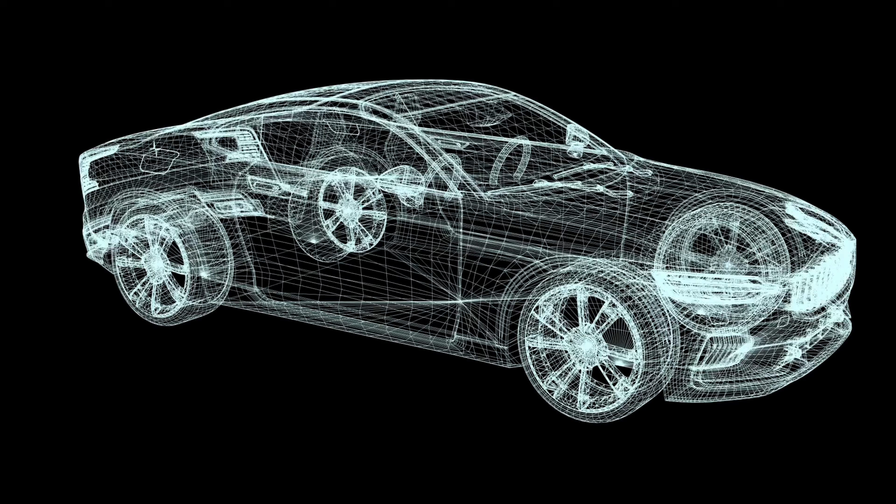AI is changing the way engineers work. From requirements and calculations, to CAD, simulation, testing, and design reviews, each stage has different opportunities and different limits. In this video, we'll connect those pieces into one engineering workflow. By the end, you'll see how these individual capabilities can be combined into a structured engineering workflow, and where AI can genuinely improve engineering productivity without compromising engineering judgment.

A large language model is fundamentally a probabilistic sequence model. It predicts tokens based on patterns learned from its training data and the context provided to it. It does not perform a free body diagram in the same way an engineer does. It does not automatically know whether a particular edition of a standard is applicable. And it does not have a physical connection to your machine.

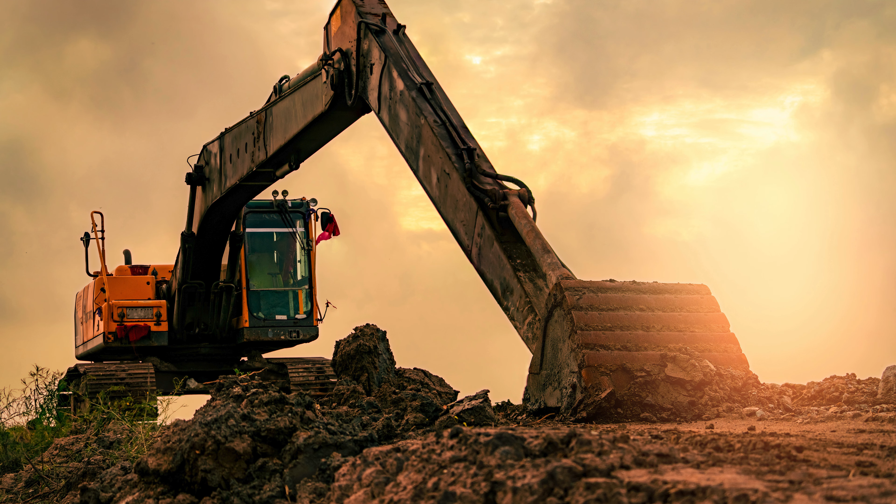So when an AI gives you an engineering answer, you should not ask, "Does this sound correct?" Ask, "What evidence supports this answer?" That changes everything. AI output should be treated as a hypothesis, not as engineering approval. The verification chain remains. AI, then engineering calculation, then validated simulation, then testing where required, and finally, engineering judgment.

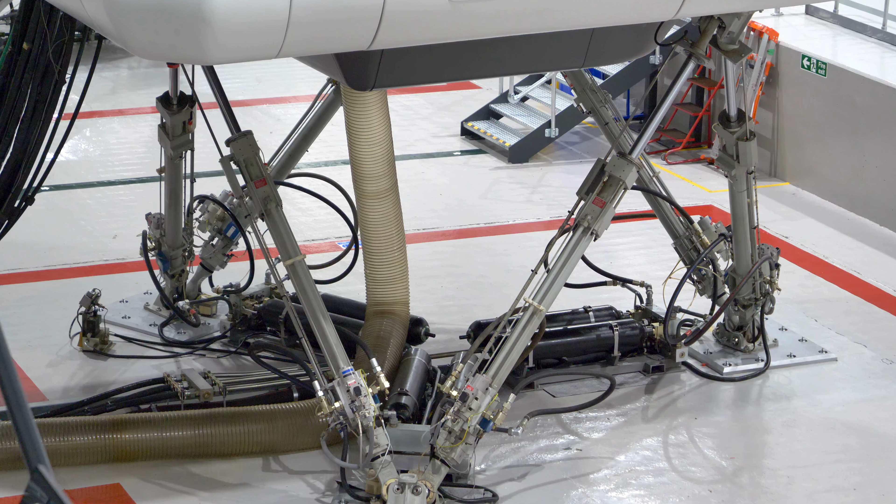This is probably the biggest change I would recommend. Don't start with, "Design a hydraulic cylinder mounting bracket." That is a poor engineering prompt. Instead, define the engineering problem. For example, I am designing a welded hydraulic cylinder mounting bracket. The maximum cylinder force is 180 kilonewtons. The cylinder pin diameter is 60 millimeters.

The bracket is fabricated from S355 structural steel. The machine experiences cyclic loading. The design life is 10 years. Identify the critical load paths, potential failure modes, required calculations, missing information, and applicable verification methods. That is a much better interaction. Mechanical engineering is not just calculation. It is problem formulation, and AI can be extremely useful at that stage.

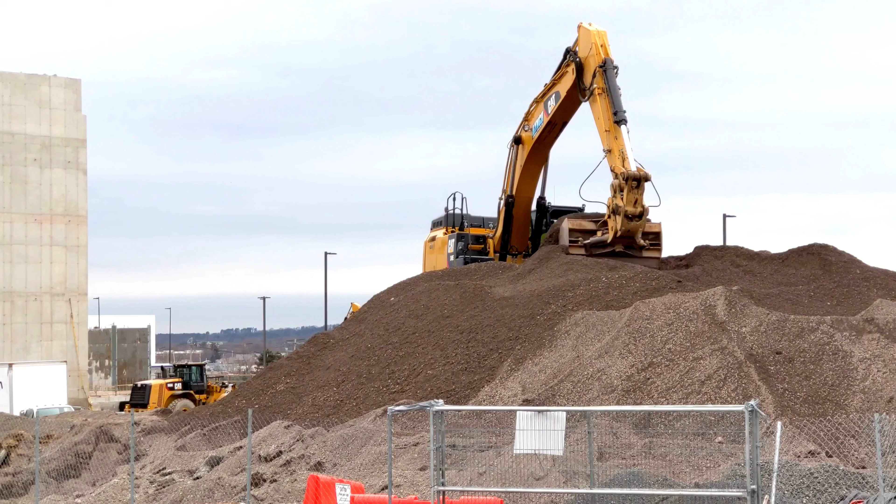One of the most underrated applications of AI is requirements analysis. Consider a requirement like, "The boom shall be sufficiently strong." That is not an engineering requirement. It is an intention. AI can help convert that statement into measurable engineering parameters.

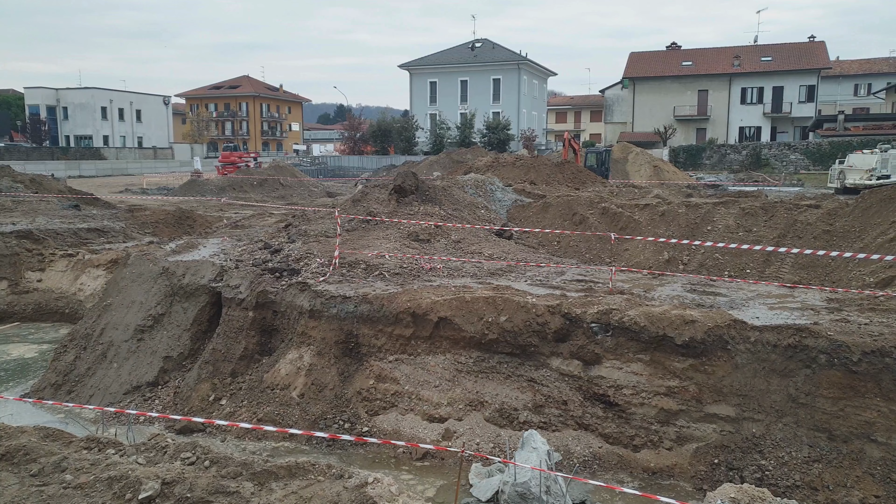For example, maximum operational load, maximum abnormal load, load direction, design factor, allowable stress, maximum deflection, fatigue life, operating temperature, corrosion environment, design life, inspection requirement, verification method. Now the requirement becomes something that can actually be verified. This is where AI can help bridge the gap between natural language requirements and engineering verification criteria.

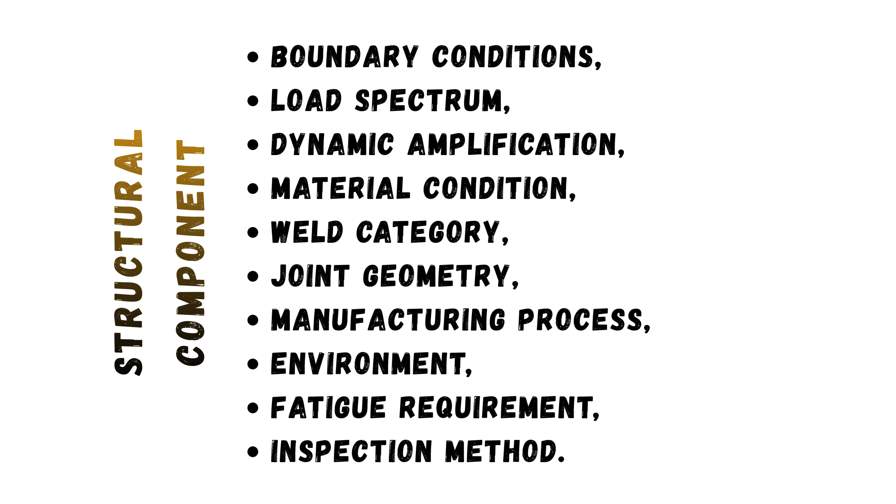This is one of my favorite applications. Give AI the design problem, and ask, "What information is missing before this problem can be solved reliably?" For a structural component, the answer might include boundary conditions, load spectrum, dynamic amplification, material condition, weld category, joint geometry, manufacturing process, environment, fatigue requirement, and inspection method.

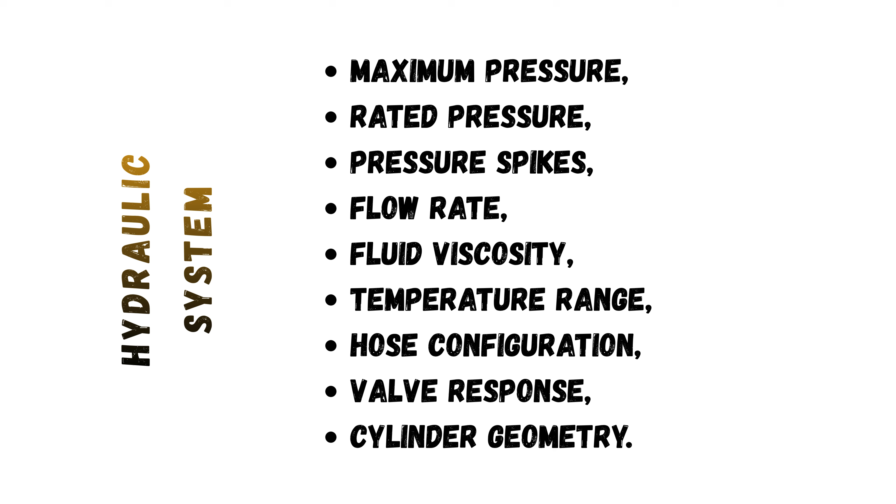For a hydraulic system, it might ask about maximum pressure, rated pressure, pressure spikes, flow rate, fluid viscosity, temperature range, hose configuration, valve response, and cylinder geometry. This is valuable because engineering errors often originate, not from bad mathematics, but from bad assumptions. AI can help expose those assumptions early.

Now let's use AI differently. Instead of asking, "Is this design good?" tell it, "Try to break this design." Give AI the design description. Give it the loads. Give it the material. Give it the operating conditions. Then ask, "Identify every credible failure mechanism."

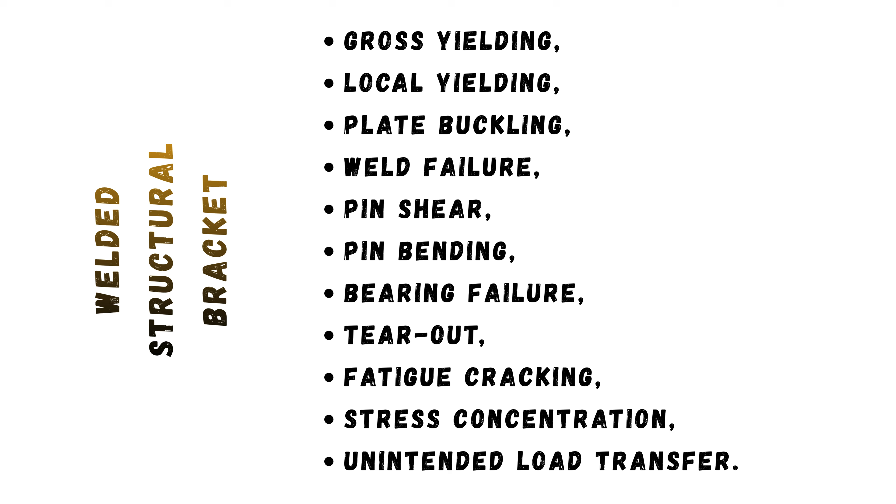For a welded structural bracket, you might get gross yielding, local yielding, plate buckling, weld failure, pin shear, pin bending, bearing failure, tear out, fatigue cracking, stress concentration, and unintended load transfer. Now the engineer investigates each mechanism. This is similar to an adversarial review. The AI is effectively trying to find weaknesses in your engineering argument. And this can be particularly useful before a formal design review.

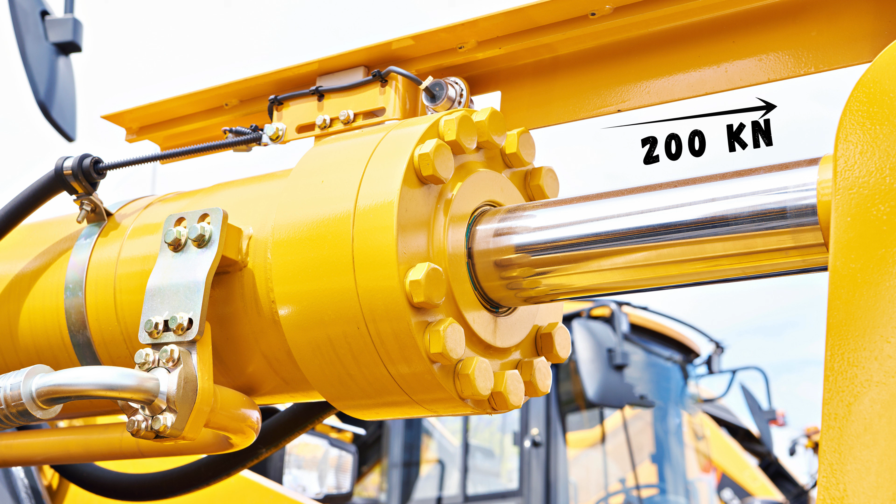Let's take a simple example. Suppose a hydraulic cylinder produces 200 kilonewtons of force. The cylinder bore is 100 millimeters. The basic piston area is A equals pi d squared divided by 4. That gives approximately 7,854 square millimeters. If the hydraulic pressure is 250 bar, the theoretical extension force is approximately 196 kilonewtons. But real engineering does not stop there.

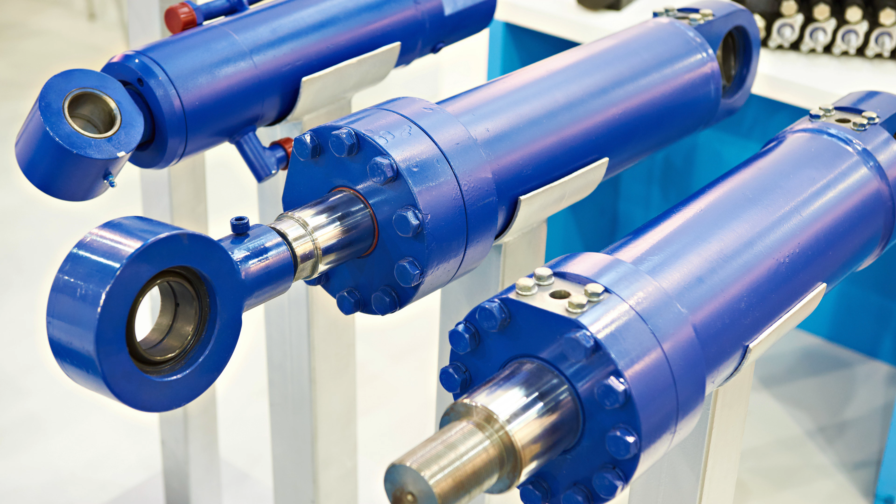We need to consider pressure losses, rod side area, seal friction, dynamic effects, pressure spikes, temperature, and the actual hydraulic circuit. This illustrates an important point. AI can help establish the calculation structure, but the engineer must understand the physical model. The model determines the result, not the language model.

Here is a very simple but powerful technique. Whenever AI gives you a calculation, check the units. Suppose AI calculates force using F equals pressure multiplied by area. Pressure has units of newtons per square meter. Area has units of square meters. Therefore, newtons per square meter multiplied by square meters gives newtons. The dimensions work. If the units do not work, the calculation is wrong.

This sounds elementary, but dimensional analysis is one of the simplest ways to catch plausible-looking AI errors. For more complex calculations, also check limiting cases, order of magnitude, sign convention, conservation laws, and sensitivity to the input parameters. These are engineering sanity checks.

This is where things become significantly more powerful. Imagine you need to calculate structural stress for 500 load combinations. Doing this manually is not engineering productivity. You should automate it. AI can help you generate the initial Python implementation. For example, input load, geometry, material properties, boundary condition, safety factor. Then calculate reaction forces, bending moments, axial loads, shear forces, stresses, deflection, and utilization ratio.

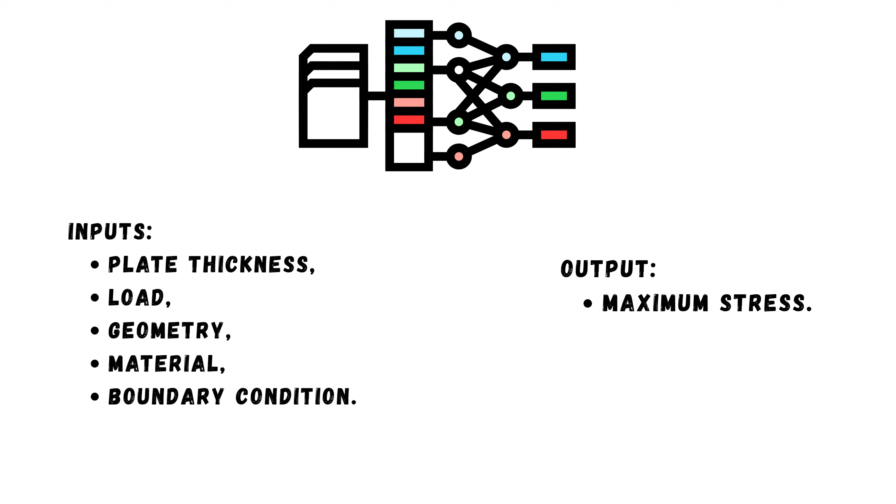There is another interesting application. Suppose running one FE simulation takes 20 minutes. Now imagine you need 5,000 simulations. That would take far too long. Instead, we can generate a smaller set of high-quality simulation results. Then use machine learning to build a surrogate model. For example, inputs: plate thickness, load, geometry, material, and boundary condition. Output: maximum stress. The machine learning model approximates the relationship between inputs and output.

Once validated, the surrogate can evaluate new design combinations almost instantly. This allows engineers to explore a much larger design space. But there is an important warning. A surrogate model is only reliable within the region represented by its training data. Extrapolation can be dangerous. So again, AI accelerates engineering. It does not remove engineering validation.

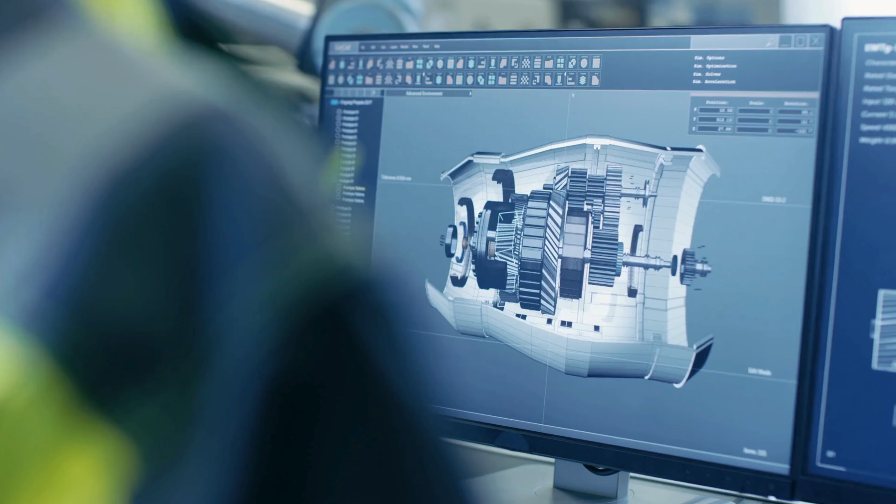Now let's move into CAD. Suppose your organization has 500 variants of a mounting bracket. The geometry is similar, only a few parameters change. Manually editing every model is inefficient. AI can help generate automation scripts for NX Open, Creo Toolkit, SolidWorks API, Fusion 360 API, or other CAD interfaces.

The engineer defines the design rules. The script controls the parameters. For example, length, width, thickness, hole diameter, hole spacing, fillet radius, and mounting pattern. Now one validated design logic can generate multiple configurations. This is much more useful than asking AI, create a bracket. The real value is AI plus rules plus CAD automation.

This is an important concept. A prompt tells AI what you want. A design rule tells the system what must never be violated. For example, minimum edge distance equals 3 times the hole diameter. Minimum weld throat equals a specified value. Maximum plate slenderness must remain below a limit. Minimum clearance must be maintained. Specified material grades only. Specified fastener classes only.

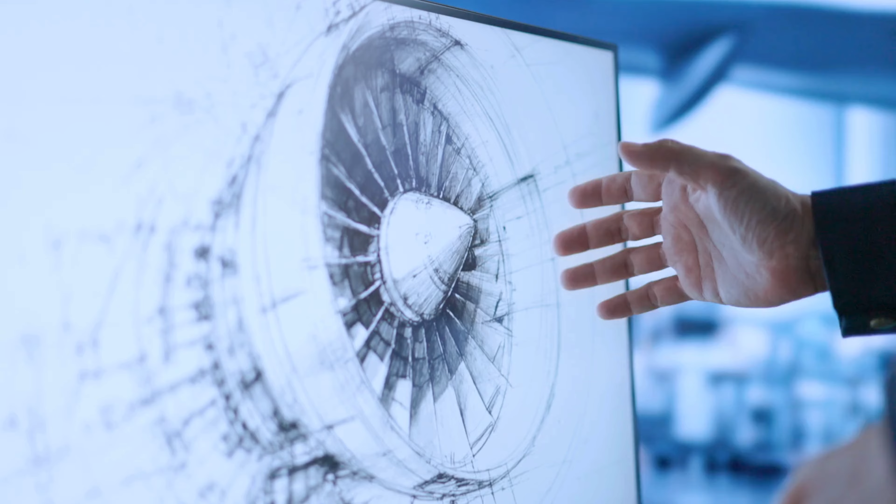If the AI-generated design violates a rule, the workflow rejects it. This is much closer to real engineering automation. We are moving from "AI, design something" to "generate candidates subject to these engineering constraints." That is a major difference.

Now consider a manufacturing drawing. An AI-assisted checking system could potentially inspect missing tolerances, inconsistent dimensions, material mismatch, BOM inconsistencies, incorrect part numbers, missing surface treatments, weld information, revision inconsistencies, and potentially conflicting notes.

But there is a critical distinction. This is a pre-check. It is not the formal drawing approval. Think of AI as another reviewer looking for obvious inconsistencies before the drawing reaches the final approval stage. That can reduce the number of errors reaching manufacturing.

This is another area where we need to be careful. Never simply ask a general AI model, "What does ISO 4413 require?" and use the answer as your compliance evidence. Instead, use a controlled document source. The ideal architecture is approved standard, document retrieval, relevant clause, AI interpretation, engineer verification.

This is where retrieval augmented generation, or RAG, becomes useful. The AI retrieves the actual source material. Then it explains the requirement. The engineer verifies the clause and applicability. This is significantly safer than relying on the model's internal knowledge.

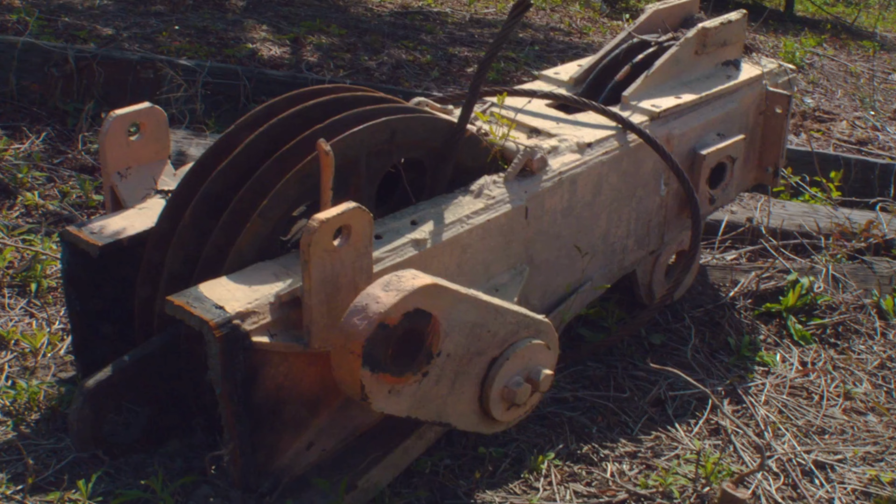Consider a failed component. You have photographs, fracture location, material certificate, manufacturing history, operating hours, load data, inspection reports, and previous failures. Don't ask AI, what caused the failure? Instead ask, generate competing failure hypotheses. For each hypothesis, identify supporting evidence, contradictory evidence, and the next test required to discriminate between the hypotheses.

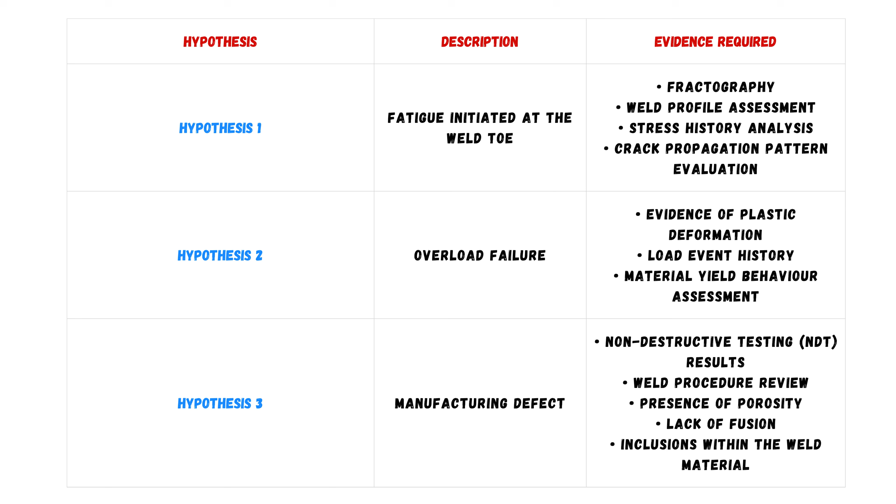For example, Hypothesis 1. Fatigue initiated at the weld toe. Evidence required: fractography, weld profile, stress history, and crack propagation pattern. Hypothesis 2. Overload. Evidence: plastic deformation, load event history, and material yield behavior. Hypothesis 3. Manufacturing defect. Evidence: NDT results, weld procedure, porosity, lack of fusion or inclusions. Now AI becomes a reasoning framework. The engineer remains the investigator.

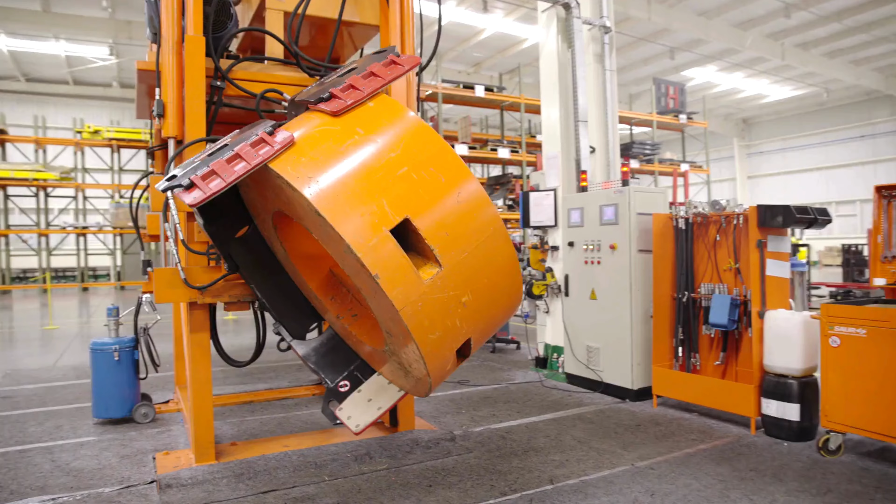Let's take a hydraulic system. The architecture contains pump, pressure relief valve, directional control valve, cylinder, hoses, filters, sensors, and control logic. AI can help create candidate failure modes. For example, pump failure, valve sticking, hose rupture, filter blockage, sensor failure, pressure loss, overpressure, internal leakage, external leakage.

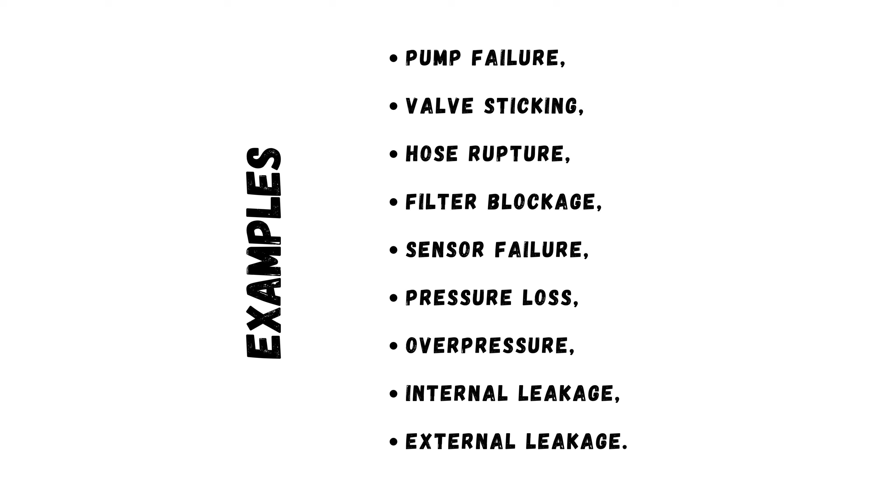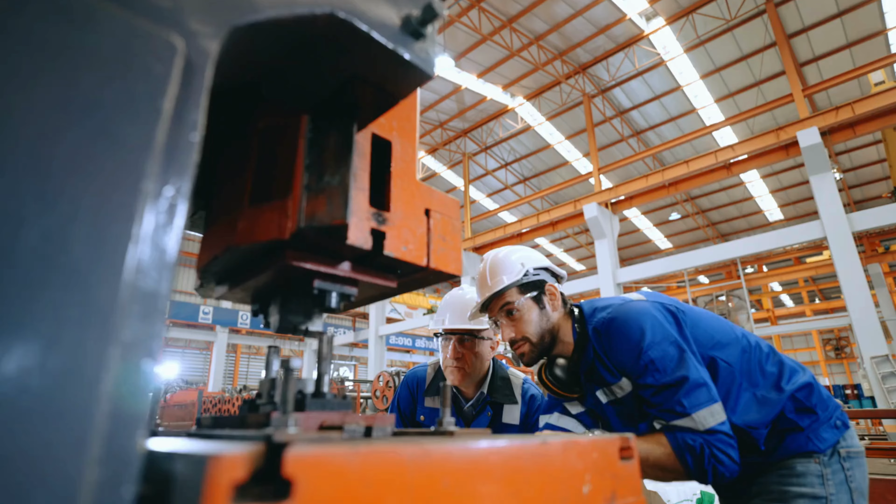Then map cause, failure mode, local effect, system effect, machine-level consequence, detection method, and mitigation. This creates a structured starting point for FMEA. But again, the final severity and risk classification must come from the engineering team.

This is an area where mechanical engineers can gain enormous value. Consider a prototype machine. You have sensors measuring pressure, temperature, force, position, velocity, motor current, vibration, and cycle time. Instead of manually reviewing the data, build a pipeline. Sensor data enters Python. Python cleans the data. Signals are synchronized. Outliers are identified. Derived parameters are calculated. Then AI can help interpret patterns.

For example, identify operating cycles where hydraulic pressure exceeded the expected envelope. Or, compare cylinder extension time across all test cycles. Or, identify conditions associated with abnormal vibration. This creates a bridge between physical machine behavior and engineering analysis.

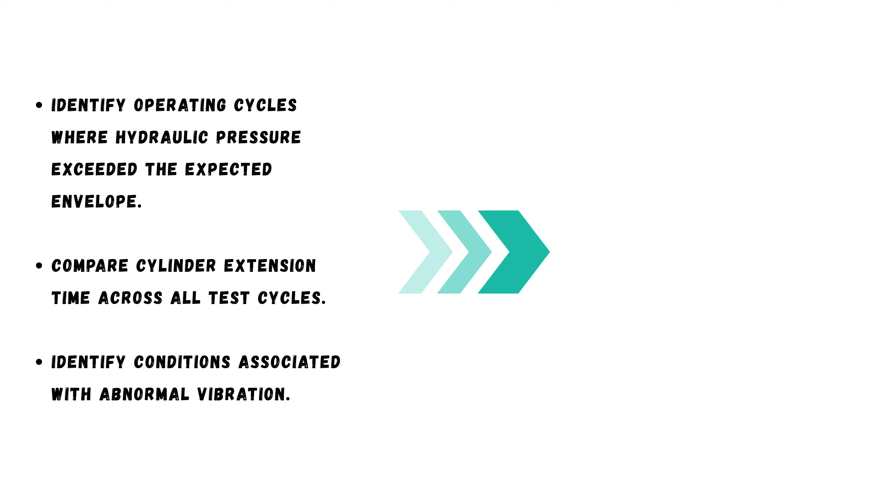Now we can take this further. A digital twin is not simply a 3D model. It is a computational representation of the physical system connected to operational data. For example, machine model, physics model, sensor data, operational state, historical behavior. AI can then help detect deviations.

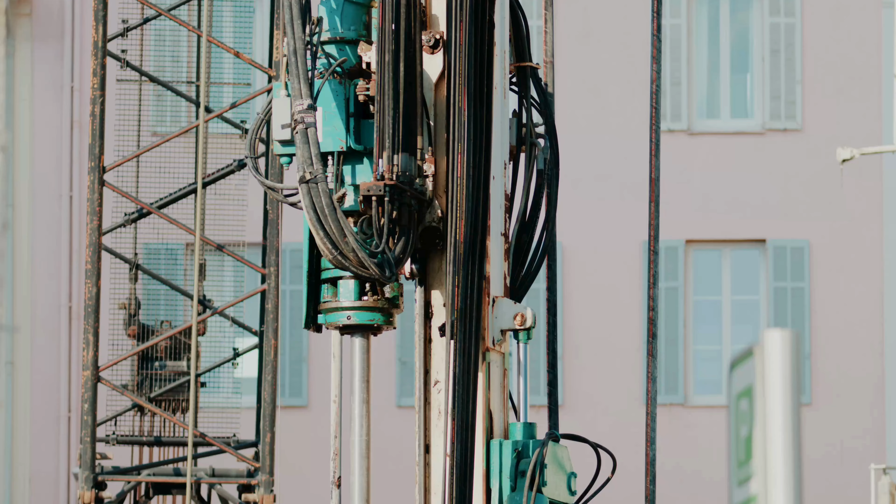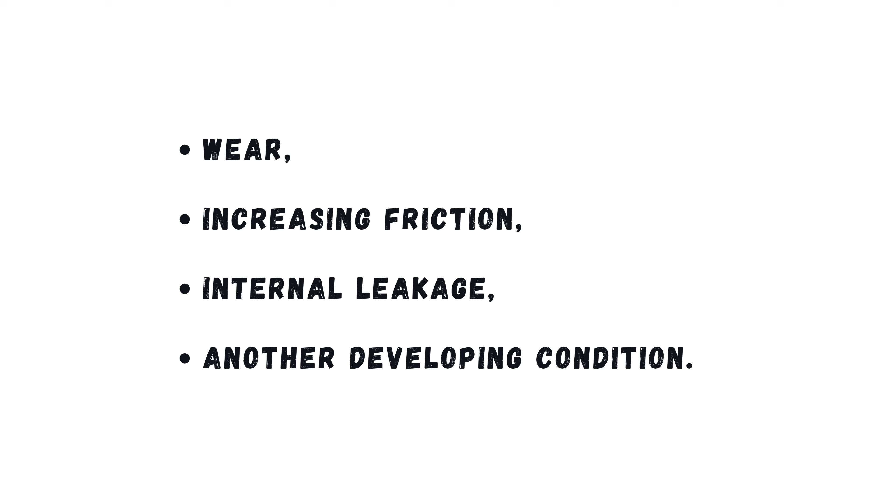Suppose the expected hydraulic pressure at a certain operating condition is 250 bars. But over several hundred cycles, the pressure required to achieve the same actuator performance gradually increases. That trend may indicate wear, increasing friction, internal leakage, or another developing condition. AI can detect the pattern. Engineering analysis determines the physical mechanism.

This is where mechanical engineering and machine learning intersect directly. Suppose vibration amplitude is 2 mm per second today. Then, 2.2, 2.5, 3.1, 3.8, 4.6. The absolute value might still be below the alarm threshold, but the trend is changing. A machine learning model can detect the deviation from normal behavior.

The engineer then investigates bearing condition, alignment, lubrication, imbalance, structural looseness, or resonance. The important concept is AI detects patterns. Physics explains them.

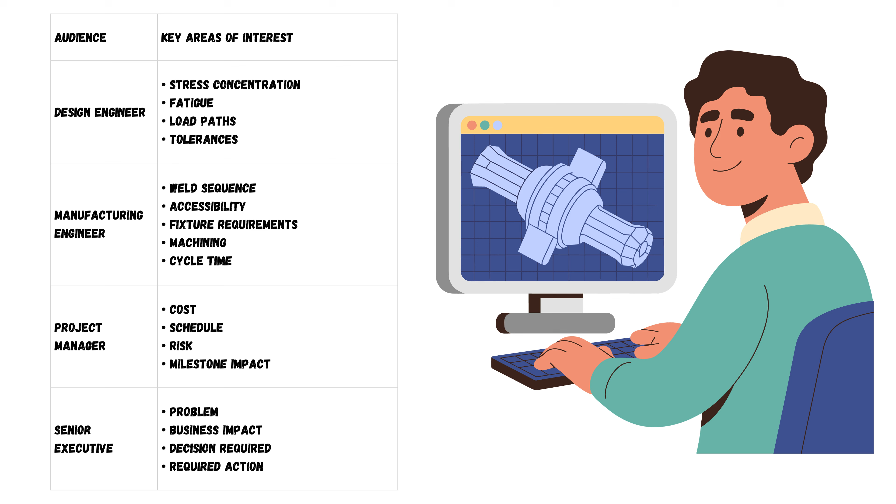Now let's move to a less technical, but very practical application. Mechanical engineers constantly translate information between different groups. A design engineer may discuss stress concentration, fatigue, load paths, and tolerances. A manufacturing engineer may care about weld sequence, accessibility, fixture requirements, machining, and cycle time. A project manager wants cost, schedule, risk, and milestone impact.

A senior executive may need problem, impact, decision, and required action. AI can convert the same technical information into different levels of abstraction. That is not merely writing assistance. It is technical information compression and transformation.

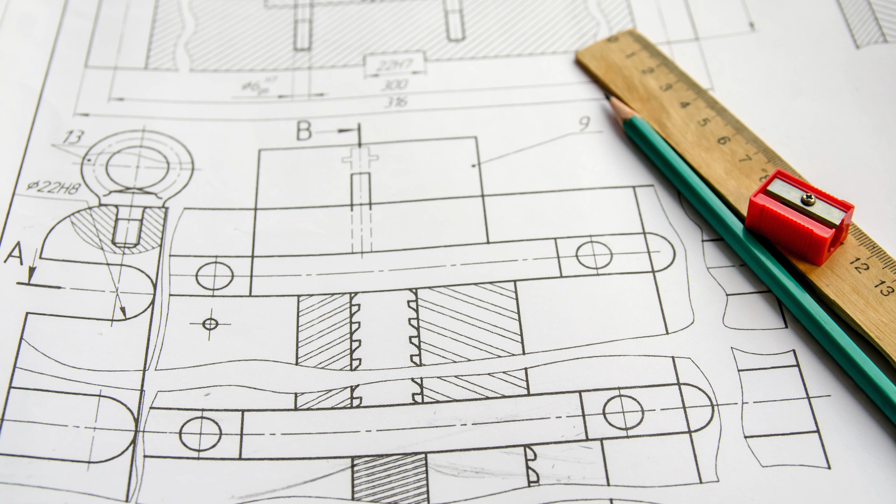Consider an engineering change. A drawing changes, but what else changes? BOM, manufacturing process, supplier specification, inspection plan, test procedure, service documentation, spare parts, cost, schedule, compliance. AI can help identify potential downstream impacts. For example, if this material changes from grade A to grade B, identify every engineering artifact that may require review.

That can generate an impact analysis checklist. The engineer then verifies the actual affected items. This can significantly reduce missed dependencies. Now we reach the more interesting part. A chatbot waits for you to ask a question. An agent can execute a workflow.

For example, you provide an engineering requirement. The system retrieves the relevant specifications, checks the document revision, extracts design constraints, runs a calculation script, generates candidate parameters, calls a CAD automation tool, runs an analysis, collects the results, checks predefined design rules, and produces a review package.

At the end, the system doesn't automatically approve the design. It says, here are the candidate designs. Here are the assumptions. Here are the calculations. Here are the violations. Here are the unresolved issues. Engineering approval required. That is a much safer architecture.

For safety-critical engineering, human in the loop is essential. The system should know where it is allowed to act, and where it must stop. For example, AI can retrieve standards? Yes. AI can generate preliminary calculations? Yes. AI can run a Python script? Yes. AI can generate CAD variants?

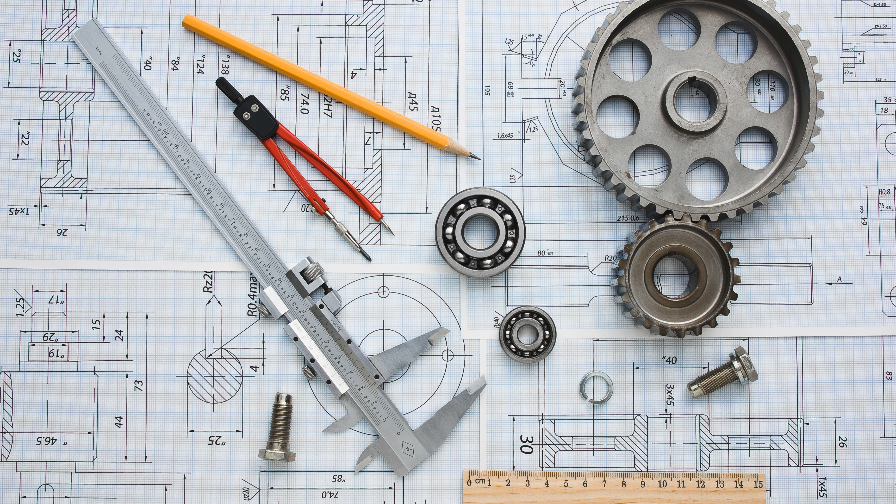If you are a mechanical engineer, you don't need to become a machine learning researcher. But you should understand the fundamentals. Start with LLMs, tokens, context windows, embeddings, vector databases, RAG, function calling, agents, model evaluation, hallucinations, data security, and AI limitations. Then learn Python, not advanced software engineering, just enough to read data, process data, perform calculations, create plots, build engineering utilities, call APIs, and automate repetitive tasks.

Then learn how your engineering software exposes automation interfaces. NX Open, Creo Toolkit, SolidWorks API, MATLAB, Python-based simulation workflows, or whatever tools your organization uses. That combination is powerful. Mechanical engineering knowledge, plus computational thinking, plus AI literacy.

If I had to choose only one skill, I would choose this: engineering decomposition. Take a complex problem and break it into smaller verifiable problems. For example, machine performance, power requirement, torque, speed, gear ratio, shaft loading, bearing loads, structural loads, fatigue, thermal behavior, testing. AI becomes much more useful when the engineering problem has been decomposed properly. Poorly defined problem, plus powerful AI, still produces poor engineering. Well-defined problem, plus AI, can produce a very powerful workflow.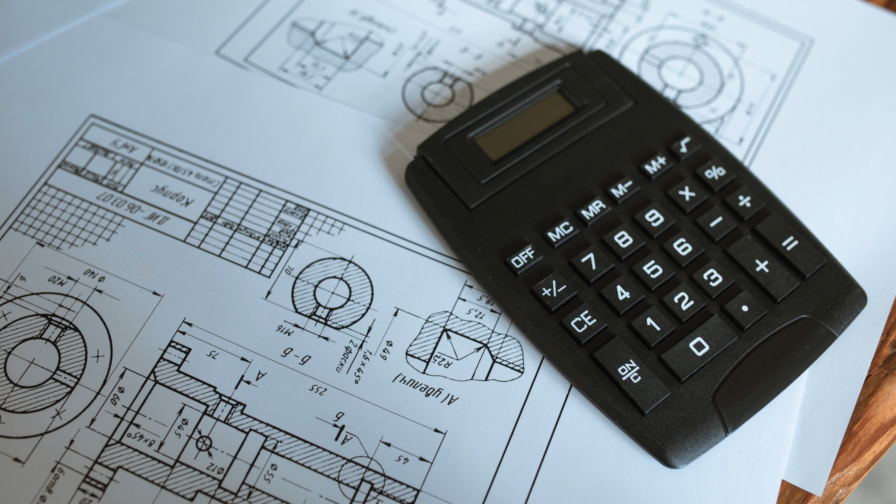So, how should a mechanical engineer use AI? Don't use it simply to write faster. Use it to think through problems faster. Don't ask it to replace calculations. Use it to automate calculations. Don't ask it to make engineering decisions. Use it to expose assumptions and alternatives. Don't use it as an uncontrolled source of standards. Connect it to controlled engineering knowledge. Don't ask it to design one component. Use it to explore an entire design space. Don't ask it, is this design correct? Ask, what could make this design wrong? That is a much better engineering question.

And perhaps the biggest shift is this: the competitive advantage will not belong to engineers who know the most AI terminology. It will belong to engineers who can connect engineering fundamentals, AI, computation, simulation, data, automation, and real-world machine behavior. Because AI can generate possibilities, simulation can evaluate them, data can reveal patterns, automation can execute the workflow. But ultimately, someone still has to understand the machine. Someone has to understand the physics. Someone has to decide whether the result makes sense. And someone has to take responsibility for the engineering decision. That person is the engineer.

The future isn't AI replacing mechanical engineers. It is mechanical engineers using AI to become much more capable. Don't compete with AI. Build your engineering workflow around it. Learn the physics, learn the computation, learn the AI, then connect them.